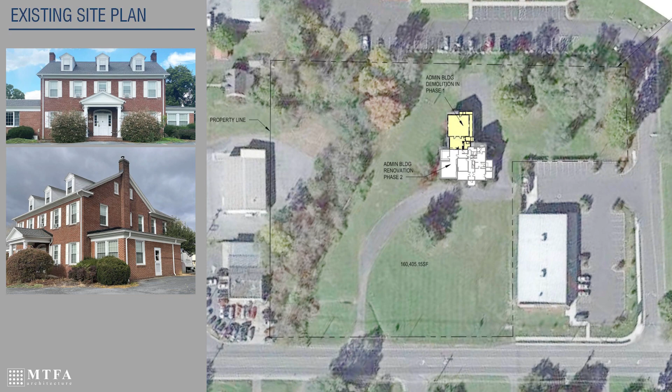We've taken a look at the property and really gotten to become very intimate with understanding that existing building. The area highlighted in yellow is being proposed as being removed from the project building today. It was one of the additions out the back, and removing it makes room for the connection to the new shelter space.

When we look at the site, understanding how people arrive is key, and there are many different people arriving at the site - potential users, client experience, staff experience, volunteers, deliveries, maintenance. How does all of this happen? Understanding where those spaces are within the building, how do you make a transition to greet someone into a facility, where is the facility itself, and how do we incorporate use of the land around the building.

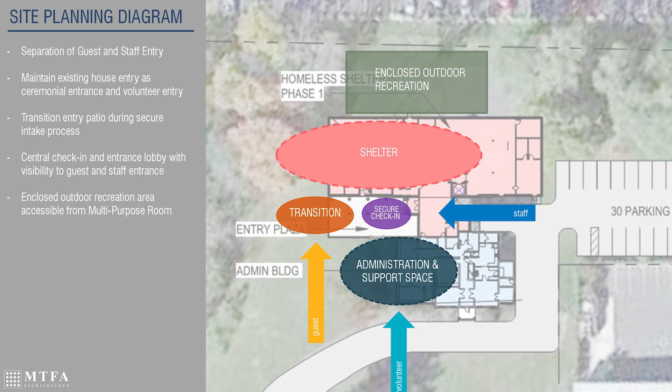Understanding administrative and support space, how does that operate, where is their security, where is their entry and parking, how do people make a transition for a secure check-in, having that normal process of being able to then enter the shelter, and then the privacy and dignity of the shelter space itself.

Looking at your site, understanding through this process and listening, we recognized the need for parking both for the staff, the community and volunteers, but also some of the clients using the space have cars. So creating separated parking that allows for that to occur.

That smaller parking lot near the entry of the shelter itself also allows for potential medical services vans, and other opportunities for fire and emergency response. Then there's still parking for staff and volunteers that's in proximity to the staff entrance to the facility.

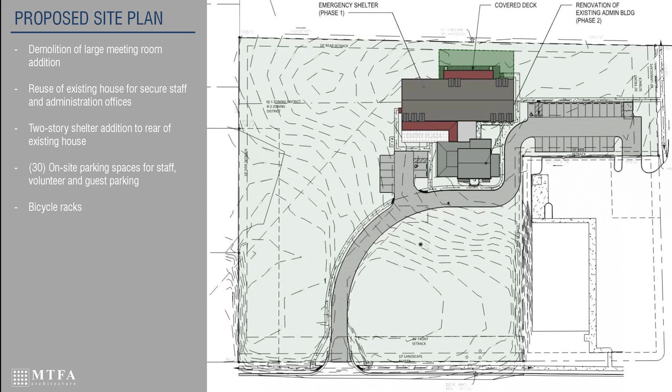As part of this, really trying to understand the plans, we've tried to color this so it's a little easier to follow, and I'll walk you through that. The area in orange is the primary entry space, the multi-purpose room, and the function of daily check-in.

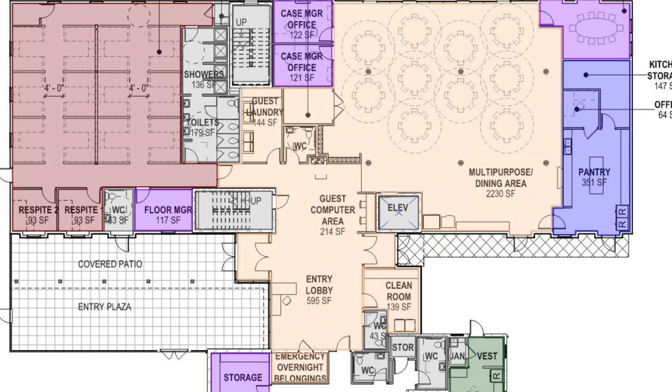Clean room responsibilities, making sure operations can be handled upon entry. One of the spaces that isn't colored is the exterior entry plaza, the opportunity space where people can transition to come into the shelter. It has a representation, which you'll see from the exterior, of how you welcome someone into the facility, how you make it low barrier. You'll see that in just a few minutes as well.

Understanding the support spaces that go with that - reusing the existing historic building for office space and staff administrative functions.

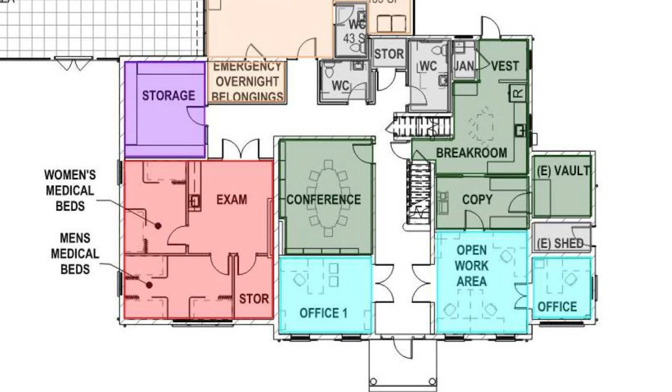The area on the lower left shows that while there isn't full medical services on site, there is a need for triage and first aid. So there's an opportunity or place where someone can be handled that's not a disruption to the rest of the shelter space, while possibly waiting for medical services. Creating that as a space removed from the rest of the shelter is important.

The area on the first floor, marked in red on the upper left, is about a third of the sleeping beds, with a combination of spaces. There are low partition walls allowing for some privacy and security, creating groupings of beds in the larger congregate area. There are also respite spaces if some isolation is required, or if someone needs privacy - those spaces are built in as well.

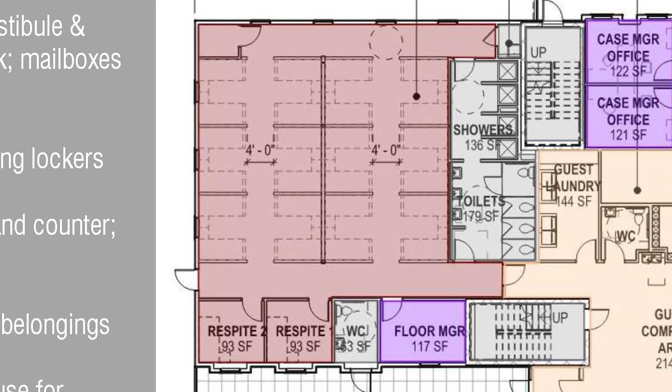On the second floor, you'll see a lot more of the sleeping areas, also shown in red, but they're all the same size, so it's being able to divide and create smaller scale congregate living with this ability to also create some of those other private spaces.

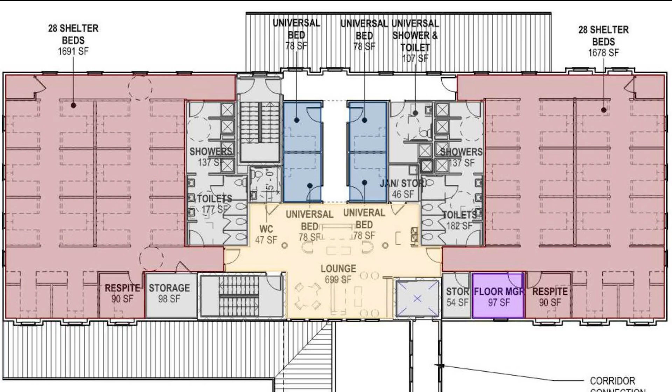In the center are universal beds, so that if there is a transgender individual or someone with a service animal, or someone who needs special isolation, that can also be provided, in a space that has not been labeled as men or women.

Access to bathrooms and showers is provided from within the sleeping areas, and the four universal beds also have access to a universal bathroom.

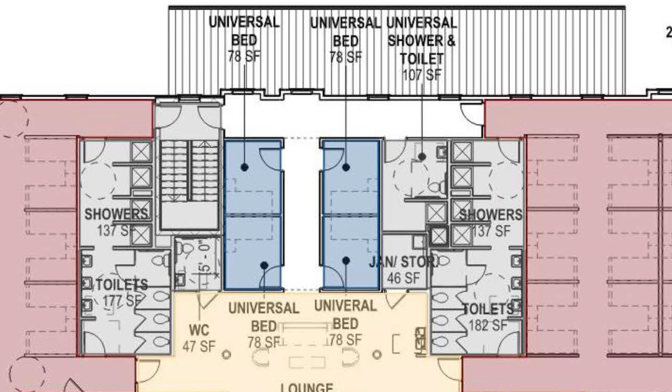The area here in orange is the lounge space. Sometimes the multi-purpose room could be loud or busy, and some people need separation. This is an alternate location of community space with small tables and movable furniture, really understanding the need for something slightly quieter.

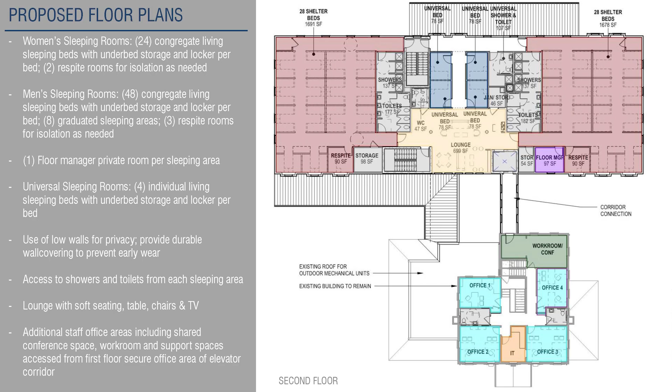On the second floor of the house, there's some additional office space and workspace - a lot of opportunities there in order to create the services needed to support the shelter.

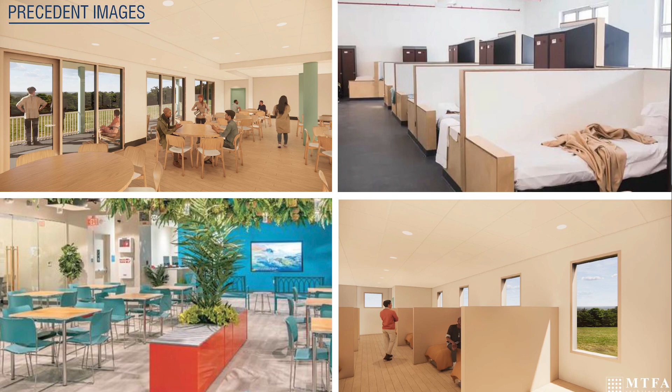Here are some examples: congregate living spaces with low partitions. The example on the upper right is in New York City, understanding the need for natural daylight - how do you create a sense of privacy and security while allowing that natural light to filter through the whole space. On the left is the idea of a multi-purpose room and its connection to nature; the example on the lower left has no daylight, so they brought the plants inside.

In our shelter design, we're looking to create that connection to the outdoors through a covered back porch with access to the landscape and outdoor space that has privacy and is not the front door.

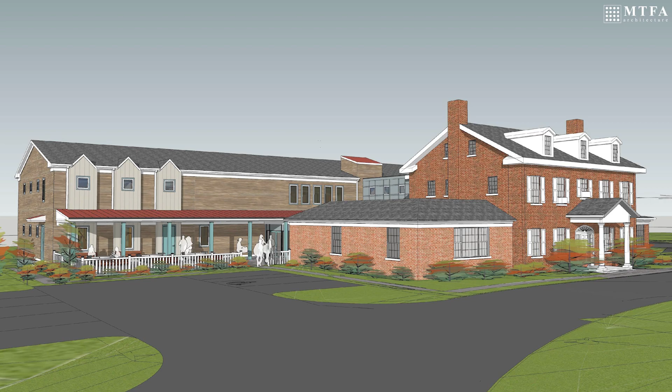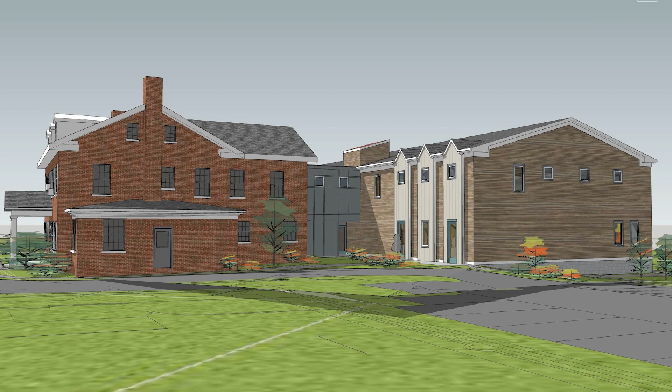Using that natural color palette of the stones, the green, and the nature, how does that show up in the building? How does the architecture reflect those values? The vision is a front porch that welcomes you as you arrive, with staff having its own secure entrance, separating the new from the old without replicating the existing historic house, but staying connected to it as one idea on the campus, with a covered porch connecting to the outside landscape that can be used at different times of day.

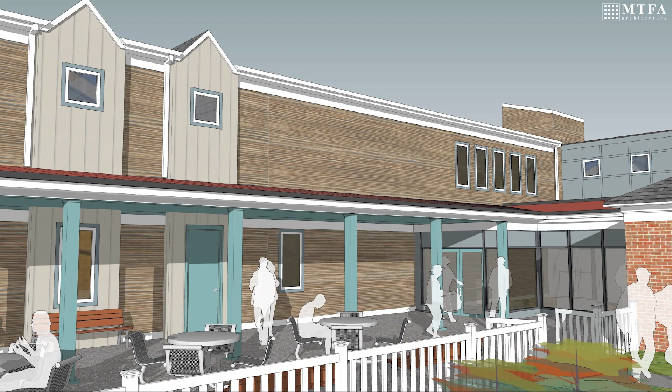This space can also be accessed at night - not the front door, not a place where other people may be active - to allow that in and out, providing a valuable place for that to occur. The entry and welcoming front porch need a covered space, because someone may not be ready to transition inside. How do you provide that comfort? How do you provide that sense of security?

Understanding the need for energy efficiency and balancing cost, planning for the future - while we may not be able to slow the project down to get everything in now, we're planning so we can hit November while allowing for future growth opportunities, like adding solar panels or other ways of creating a more efficient energy envelope.

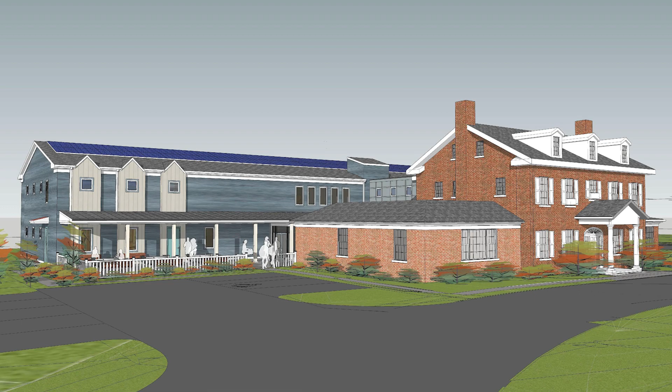Here you can see the same views you've already seen, but understanding that the separation of the old and new and the connection to the landscape can be achieved in multiple ways - again, that back porch and cool-down space, and the opportunity to create a community using the architecture to do so.

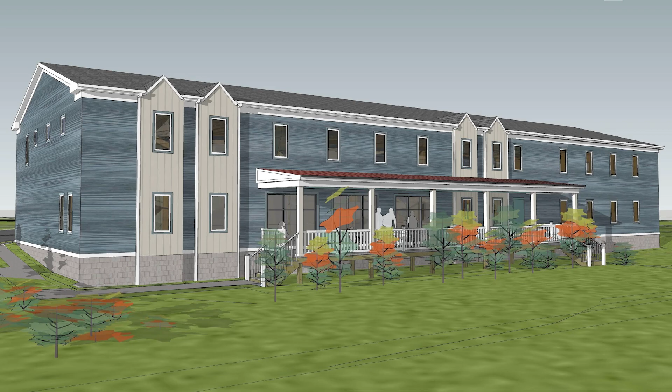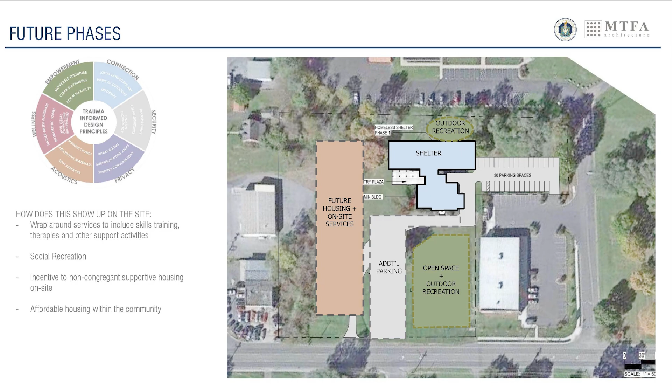And again, that front porch and entry, standing outside protected from the rain, making that transition to the inside. The idea of stewardship of the land - this is just a piece of the puzzle. There's not one solution to ending homelessness, but understanding how our planning informs the future, allowing the site to expand, providing more supportive housing services potentially on site, and allowing for open space and growth over time - not just our building, but the site itself - to provide more than just this immediate need.

So our next steps - what are we going to take away from this? We're interested in hearing what you have to say, and we'll take that into consideration as we continue working through our design drawings. We're hoping to have drawings out for construction bid by April, so we're working furiously to get to building permit drawings. This is a really important time to hear input on how we can make this project successful, and we'll put out the next update to stakeholders in that same timeframe, late March or early April, as we head into construction.